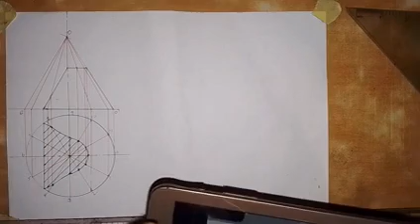Then we are asked to draw the auxiliary plan in the direction of ROT. So this is the diagram, and this is ROT here. Now let's go and produce the auxiliary plan.

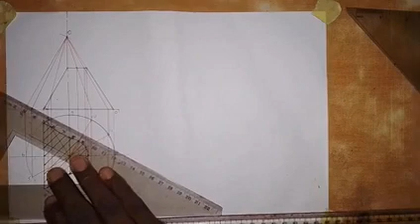With my 30 degrees set square, I'm going to start from this point 6 prime here, and draw a line in the direction of ROT, as we see in the diagram. Then I will also bring it to this point and draw a line in this direction.

Also at this point, I will put it and draw a line in this direction, bringing it to this point here, which I believe you can see. I will also draw a line in this direction, bringing it to the center, that is for 3 and 9, and draw a line in this direction.

Bring it to this point for 2 and 10, I will draw a line. Bring it to this point for 1 and 11, I will draw a line. I bring it to this point, which is for 0 prime, and also draw a line in this direction.

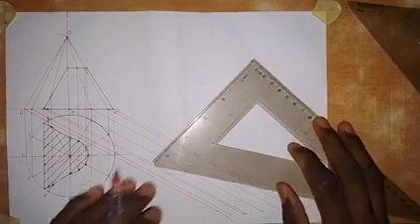Since I have drawn these lines with the 30 degrees set square, I will draw a perpendicular line to this line, using that of 60 degrees. So I will draw a line like this.

Now, looking at this line, this is 0.6. If I follow this first line that I drew from 6 prime, this is 0.6, while this point here is for 0. Take note of that.

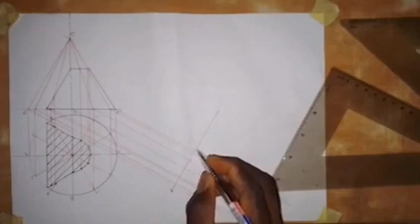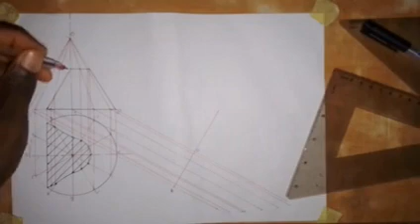Now the next thing I'm going to do is note that this part is cut off. This part here from 6 to this point is cut off, so we are not going to make use of that of 6, 6, 5, 7. We are going to make use of this one here, which is where the cutting plane touches the base of the cone.

So what we are going to do now is take your compass, as I've taken my compass here. This is the vertical line that we produced down here, and the midpoint is here on 0.6, this is the midpoint. Put the midpoint at the middle point here and take this distance from this point here, which I'll call point A, from the midpoint to A. Just take this distance like this.

Take this distance, then follow this line, the line that we produced from this point here, and come to the center here. Then make an arc on this side for A, and also make an arc on this side. So this is point A, and this is also point A there.

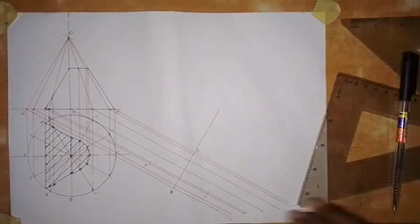Next is we have that of 4 and 8. So this is the vertical line, and the midpoint is here, where the point we used to produce the curve is, not on the circle, the point is here.

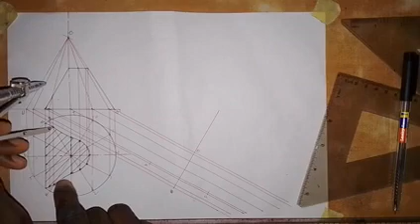What we need to do is make use of the vertical line that connects 4 and 8 together, not the one that gives us the point. So this is the line from 4 to 8 here.

We put it at the midpoint and extend it to 8 or to 4, whichever we like, either from this center to 4 or from this center to 8. We take it and follow line 4, 8, which is the line after A, and make an arc here, then also make an arc here. If I'm to label this point, this will be point 4, while this is point 8 here.

So next we have that of 3 and 9. So this is line 3 and 9. So from the center, we either extend it to 3 or we extend it to 9 on the circle. So this is it. Okay, so then I follow this line that connects 3 and 9 together. So I make an arc here, and I make an arc here like this. So this is point 3. Okay, so this is point 9.

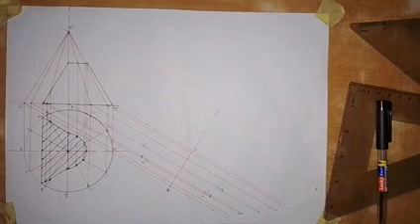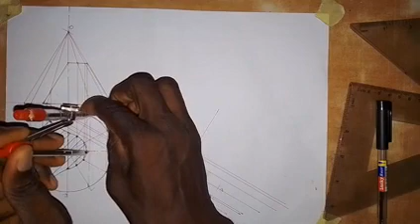Okay, so next we have that of 2 and 10. So this is the vertical line that connects 2 and 10 together. So from this point I will extend to 10. Okay, so we have this point. Then I will follow this line for 2 and 10. So I will make an arc here, and I will make an arc here. Okay, so this is point 2 and this is point 10.

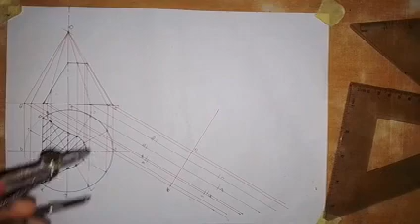Okay, so next we have 1 and 11. This is the middle of 1 and 11. I will extend to 11, or I extend to 1. So then I will follow this line that connects 1 and 11 together. So I will make an arc here, and then I will make an arc here. Alright, so these points we are going to join together with the use of a French curve. Okay, so I'm trying to bring out the points for us to see them. Okay, so this is point 1, this is 11.

So with the use of a French curve... but before that, this AA will be a straight line. So let's take note of that. This AA will be a straight line. So make it a thick straight line like this. Then we use our French curve to connect these points together.

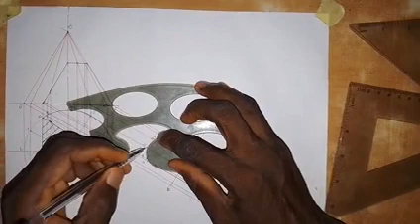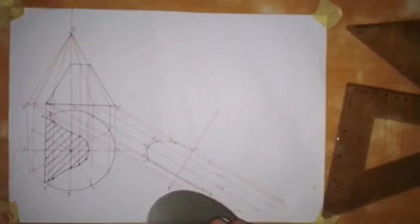Okay, so then this part here will be hidden. So we draw it with short dashed lines. Okay, so it will be hidden from us. This part will be hidden from us as we are looking at it in this direction. So also from here, I will also draw it with short dashed lines. Okay, so then let me bring out the curve on this part here. Alright, so that's what we have for the base part.

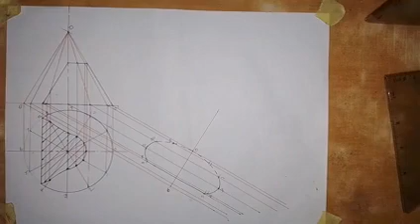Now, the upper part, how are we going to draw the upper part? So that's what I want to do now. So what we need to do first is locate this apex here in the auxiliary plan. So with that, I will just take my set square, and bring it to this point, then I'm going to draw a line from here. Okay, so now here we have point O, so I just call it O prime here in the auxiliary plan.

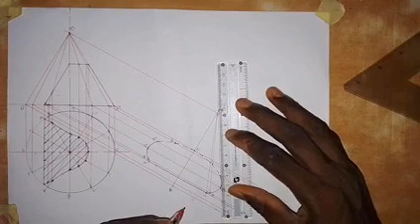So the next thing we are going to do is draw a line from each of these points. So for this point A here, I will draw a line to touch the apex. So this is it, to meet the apex. Then from point 4, I will also draw a line to the apex. From point 3, I will draw a line to the apex. I can see that point 3 and 2 are together, so I've drawn a line for that. Then point A also goes with 1, so I will leave it like that.

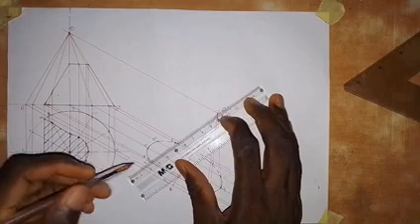Also, if I come to point A here, I will draw a line. So here we also have that A goes with 11. So let's take note of that. And point 8. So for point 8 here, drawing point 8. So this is it. Okay, so then point 9. So point 9, if I draw it here, it goes with that of 10. So let's take note of that.

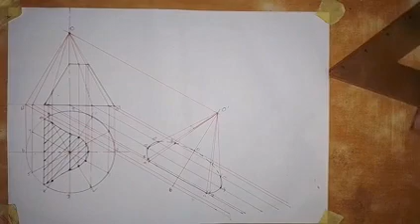So what I'm going to do now is, with my 30 degrees set square, I will start like this. We start with 4 and 8, which is this point. So I'm going to draw a line from this point with that same 30 degrees set square, like this. Okay, so then I will look for where it intersects 4 and 8. So it intersects 4 at this point, and intersects 8 at this point. This is 8 here. Okay, so next we have 3 and 9, which is this point.

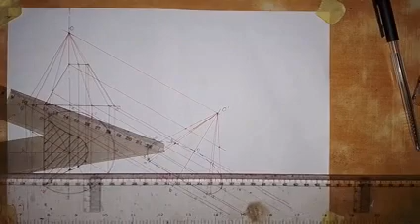So if I draw from here, I'll look for where it intersects 3. So this is where it meets 3 at this point here, and it intersects 9 at this point. Okay, so next we have 2 and 10. Don't forget that points 2 and 10 are on 3 and 9.

Okay, so if I come to this point here, this is the point. So if I draw like this, here we have 2 at this point, and here we have 10 at this point. So next is 1 and 11. So if I draw from this point for 1 and 11,

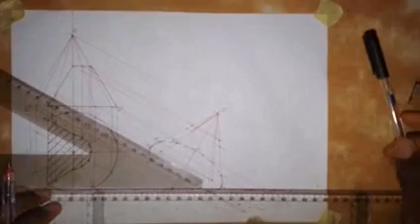okay, so if I draw from here, 1 is together with 4, which is this point, and 11 is together with 8, which is this point here. So the last one we have is 0, which is this point here. So I'll just come here, and then I'm going to draw a line. So this is where we have 0.

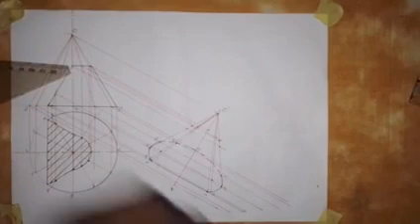Okay, so then we are going to join this together. So we are connecting everything with A here, and then we also have A at this point. So with my French curve, I will set this line. There is something I notice here: this point that we have here for 11 is not supposed to be here. Okay, but I'm just trying to work it out.

Okay, so I think that little error that we have there is due to the positioning of the T-square. Okay, so then here we are going to have a straight line. This will be a straight line, as we have a straight line here for 3 and 9. So we also have it as a straight line here in the auxiliary plan.

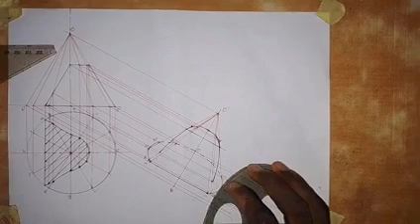So the next thing we are going to do is connect. Okay, so this is where we have a point, so we connect this together. Then if I turn it here to this side, we connect this point together like this. Okay, so here it's going to be like this. And here also it will be drawn like this.

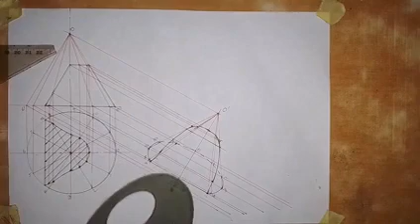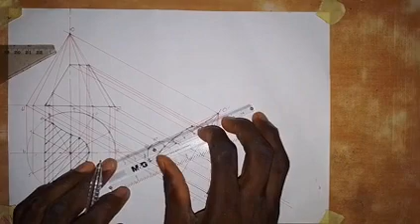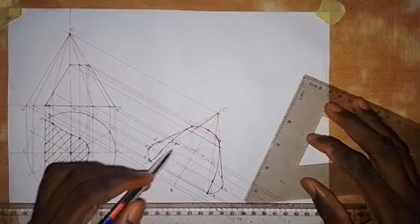Alright, so the next thing we are going to do is show that it is rough here. But before that, we are going to draw this line like this, and then we also draw this line. Okay, so then we have to show the roughness of the surface. We have two parts. This part and this part, we are not going to hatch them together. So we hatch them separately.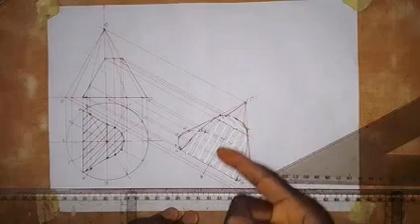So I will use the 30-degree side to do this. Let's hatch this surface, let's produce hatching lines on this surface. We are going to produce them separately because we have two parts here, this part and this part. The hatching lines that I produced before were not okay, because the lines were parallel to this line that we drew with 60 degrees. That's why I cleaned it and I'm going to produce it right now.

So I'm using my 30-degree set square to do that. I would have used 45, but I can use 30 for this. So I'm going to produce the hatching lines for this large surface. So we produce hatching lines like this.

So don't forget that the hatching lines are produced with continuous lines and they are equally spaced. As I said, you don't have to measure the amount of space between them. All you need to do is just use your eyes to gauge it yourself.

So these hatching lines that we are producing are correct. It's the angle that we have taken. The one I used 60 degrees for was not okay, so that's why I cleaned it and I'm now producing it properly. Alright, so this is okay.

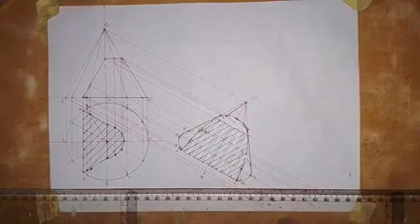Now let's go for this upper one. I'm going to use 45 degrees for this one, but I'll produce it in this direction. So we have to change the direction of the hatching lines. Alright, so this is how it should be. The reason we have it hatched in different directions is that this is one surface and this is another surface. So they have to be hatched in different directions.